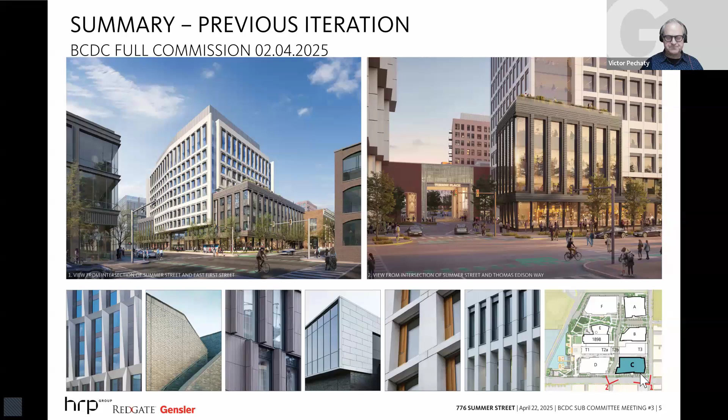These are two vignettes that are stills from an animation shared at the February 4th full commission meeting. We're showing these images because they really did spark discussion and concern about the heaviness of overlapping building forms over the pedestrian realm.

That comment and concern took us to a fundamental new look at the overall massing of the site. Those iterations transitioned us from the option you last saw on the right, a concept we called fold, to the current concept we're sharing this evening, now called podium. The fundamental difference is the fold concept has the taller portion of the building overhanging and proud of the base. Among other changes, that relationship has now been inverted, with the 10-story portion of the building recessed from prouder elements that are part of the base, which we're referring to as two podiums.

Please note the red property line and setback line. The new massing continues to give back area within the building's ground floor footprint to expand and enhance the public realm.

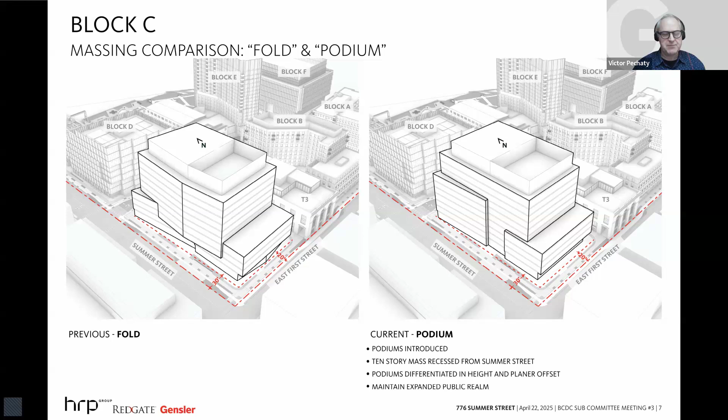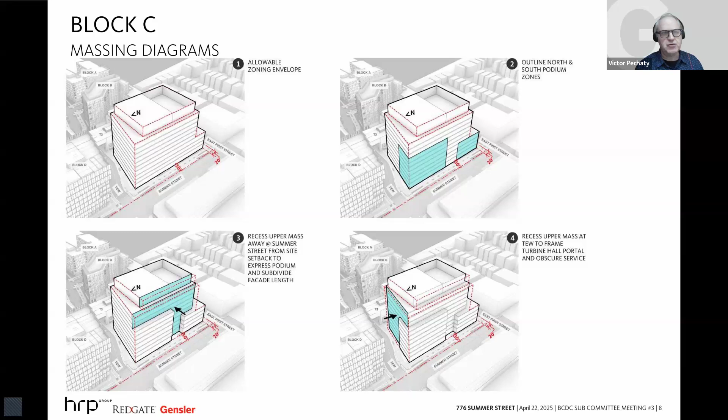The next two slides are eight diagrams showing the rationale behind the new podium form. Diagram 1 is the allowable zoning envelope. Diagram 2 outlines where the projecting forms will result. Diagram 3, one of the more significant moves, takes the full height of the building and recesses it 15 feet back from the setback. The northern facade is also recessed further from Thomas Edison Way to reveal the two projecting forms, the north and south podium.

Diagrams 5 and 6 show that the south podium is further recessed from the site setbacks. Diagram 7 shows the north podium taking on an angle to guide pedestrians coming from the north towards the building entrance. Finally, diagram 8 shows an ongoing commitment to transparency at the ground floor.

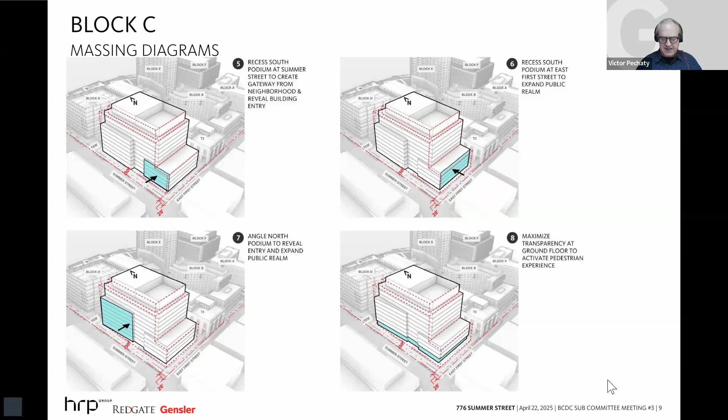The master plan design guidelines stipulate that Block C should mediate scale from higher portions of the site towards the waterfront, transitioning downward towards the 4-story development along East First Street. The two projecting forms, the two podiums, transition from 10 stories to 7 stories to 4 stories to honor that design guideline.

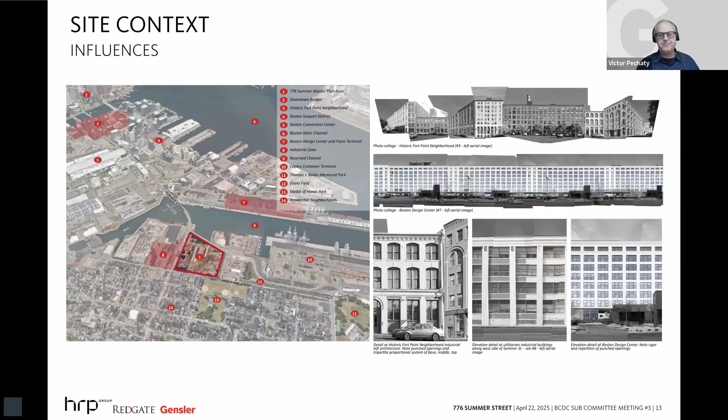The adjacent turbine halls are also examples of architecture that celebrates its industrial use, but at an entirely different, one might say monumental, scale compared to the precedents we see in the historic Fort Point neighborhood.

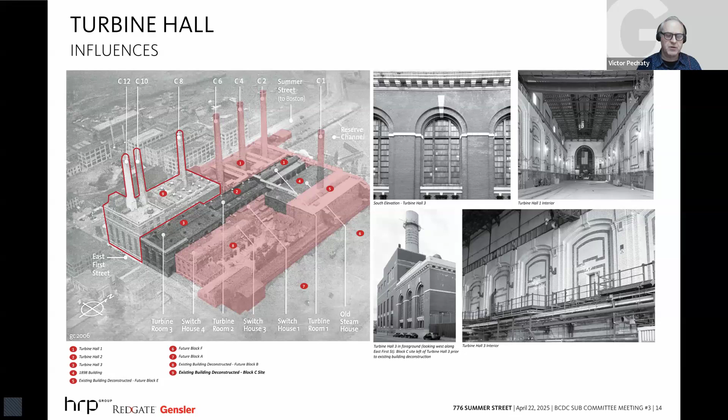In the current design, it isn't our intent to literally replicate some of the details that informed the design, but we do seek to synthesize some of those influences through a modern lens into a building that reveals the DNA of the industrial architecture of the area.

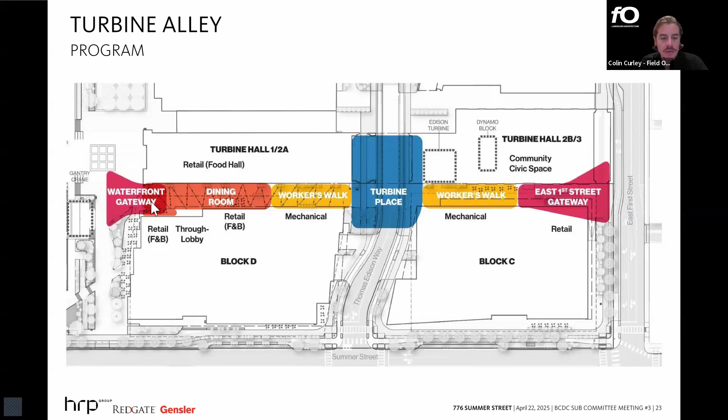Okay, so quickly here, this is the plan of Turbine Alley. Significantly, we've elevated the corner at the northeast corner here to 25, so we have a flush condition at the building. We no longer have that sunken recessed condition. A planter subdivides circulation down into the alley, with opportunity for civic and community space to spill out, but really thinking of this stretch of Turbine Alley as the pedestrian connector to the more active waterfront.

And I think, Victor, if you want to just speak to the character here. I'll wrap up, Christina. Thank you for the bit of grace.

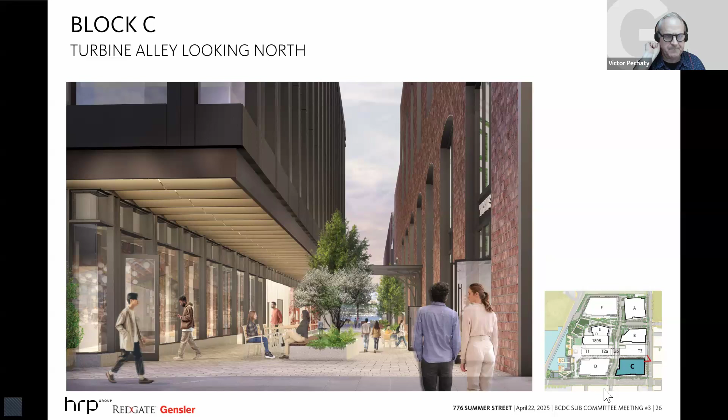We're showing you 3 animations tonight. The first will be here with Block C, and the other 2 will come later. Kate, let's roll the animation, please.

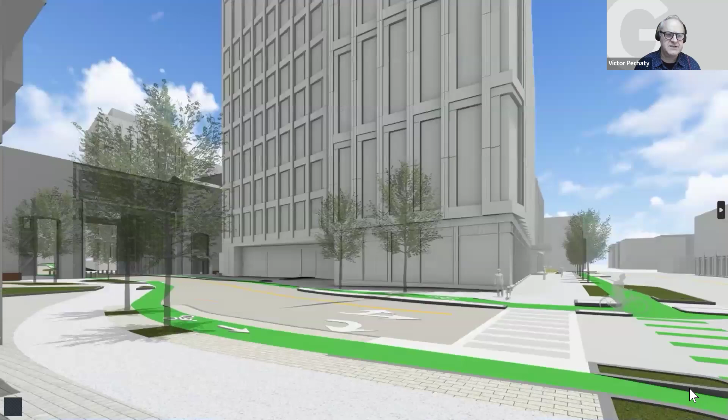So the walk starts north of Block D. As we walk along Block D, we'll pass the Block D entrance to our left-hand side, continuing to walk along Block D with the storefront and retail to our left, arriving at the intersection of Thomas Edison Way and Summer Street, where we'll look to the east, seeing the portal into the Turbine Hall beyond.

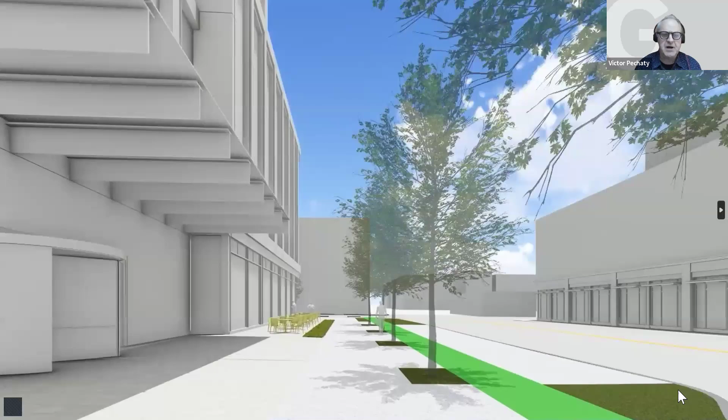Crossing Thomas Edison Way, the northwest mass of Block C provides a good illustration of the stepped facade, canting back towards the main entry into Block C, highlighted by a steel and glass canopy. Just south of the Block C entrance, the public realm widens again for a few bays, providing more street frontage. As we approach East First Street, we'll look to the east and see the portal into Turbine Hall 3.

That's a wrap for Block C. Kristina, thank you for a couple seconds there extra. I really appreciate it. Not a problem.

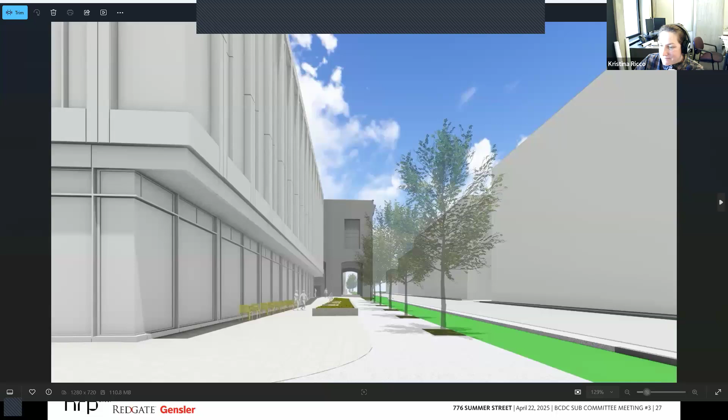Commissioners, we turn it over to you for discussion. Thanks, Victor. I just wanted to say, Victor and Colin, that was a really clear presentation. Thank you for walking us through all this. I think I was at the last presentation of this building, so it's nice to see it emerge and evolve.

David: Oh, thank you, I was going to say the same thing. Thank you very much for the presentation. I think that I very much understood the process that you've gone through. Just a couple of quick comments, and I'll keep my comments focused on the architecture.

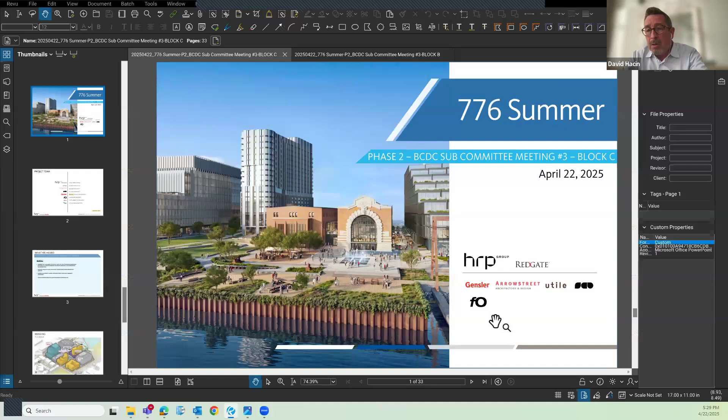While I very much appreciated the sculptural, dynamic quality of the first scheme, I also understand why you've come to the new podium design, and I found that strategy to be particularly compelling in the elevation diagram where you showed how it would step down to the neighborhood along First Street. I thought that was a very thoughtful diagram that will go a long way in terms of the actual experience of that street and sort of holding the edge of that street, so I think that all makes sense.

I also appreciate the simplicity of the framing techniques that you're thinking about using here, within the historic context of waterfront architecture. I guess I just have a couple of questions and comments that I might ask you to think about. When you did the animation, it mostly has to do with the storefronts at the level of the storefront itself.

We've had this conversation many times about how important it is to keep the flexibility of the storefronts to accommodate multiple retailers, et cetera. But I do find it a bit relentless, just in its simplicity and purity as it moves around the building. On the piece adjacent to Thomas Edison Way, where there's the serrations above, I think actually that's quite dynamic, Victor.

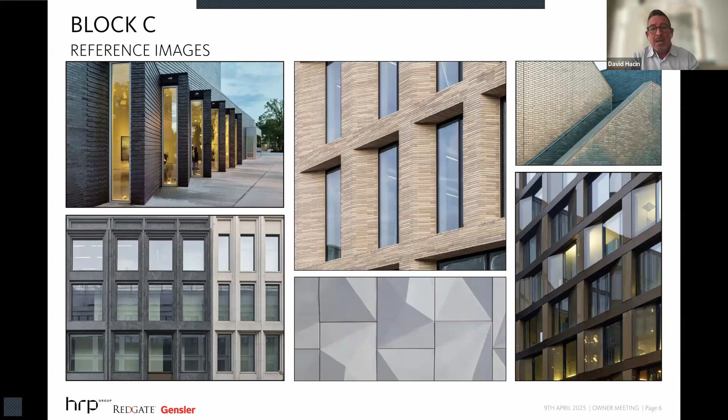If you go to that view, down East First, I think you're referring to. Yeah, thank you, that view. I mean, the framing is very clear up above, and it's just a little severe, to my eye.

The other place where there may be an opportunity to really echo the scalloping and some of the ideas that you had in the first scheme is in the canopy of the building itself, the canopy to the front door, which I think right now is a sort of simple extruded frame, which is very elegant. But I wonder if that couldn't be a little bit more of a statement, especially given the very sculptural quality of the building next door. Is there something there that could really announce entrance in a way that recalls some of the folding and stuff like that you have elsewhere in the scheme?

A question. And then my last comment is that I'm all for contrasting with the brick of the turbine hall and making the new building read against that. And I'm not suggesting brick. However, it does feel cool. The building feels very cool relative to the warmth of the historic structures. And I wonder, as you think about the palette of the panels and stuff like that, is there an opportunity for it to...

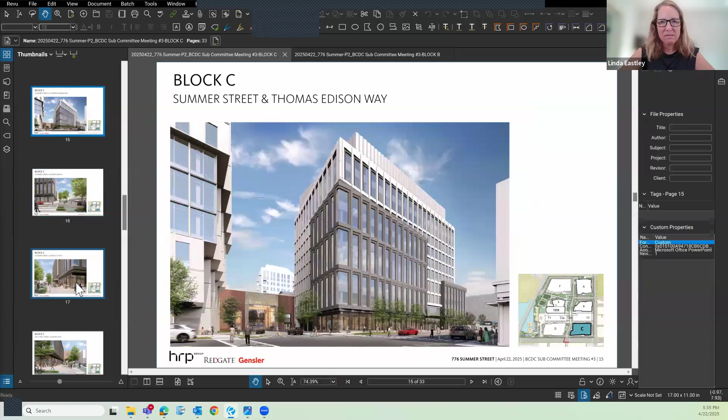I'm really talking about the corner at Summer and East First. So I think this one's okay. My comment here is I think you were describing the different heights of these framed windows, and I actually think that they're quite successful. And I love the idea that you're announcing this is an important corner. I actually think it'll feel very much like a gateway to the project as you're coming along East First Street.

But I am struggling with the scale. I think these are 3-story framed windows. And I wonder if you've looked at other scales, and it might be helpful maybe to go to one of those earlier images that show, yes, that's great. I wonder if you've looked at other scales instead of doing a triple height framed window here on the corner, whether there's another scale that might feel more in keeping with the pedestrian and the idea of having an entry here.

Commissioner Eastley, similar to what I said to Commissioner Hacin, this is also an ongoing conversation with staff. We have studies in process that were a little underbaked for this session. Staff had questioned the scale, the size, the height of those openings, so studies are already in process and we'll be providing different iterations for that piece.

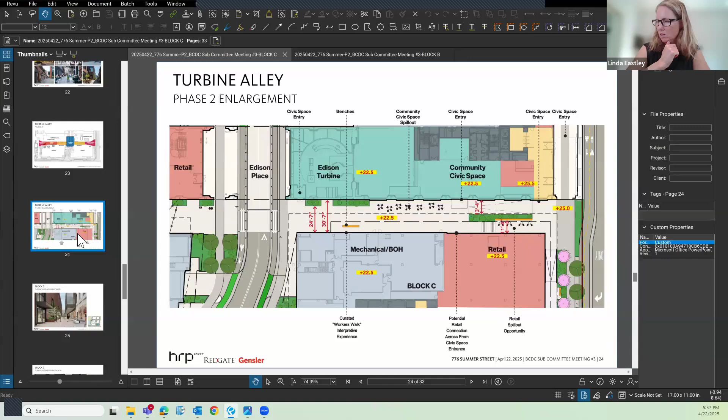Thank you. My next series of comments are about Turbine Alley, so Colin, these might be more for you. If we could go first to slide 24. There are two things I'm curious to hear more about. We're looking here at essentially the back of mechanical space in Building C, is that right? That's right, yes.

Okay, and so the idea here is that there would be a type of graphic telling the story, the history of the turbines, something along the lines of telling stories of people, some kind of history of the whole power plant there. Okay, so my comment here is that I wonder if this will feel like it's too long.

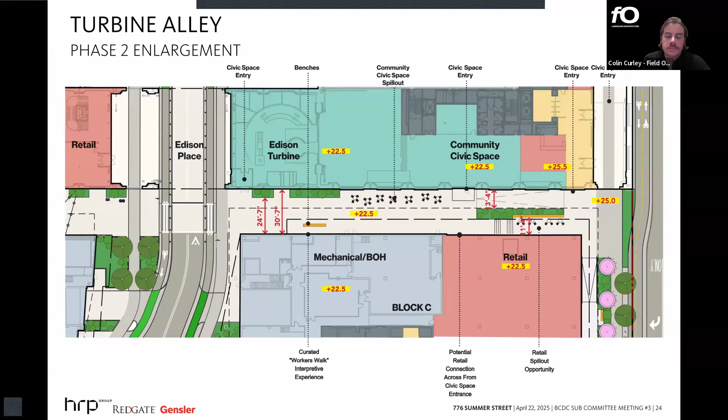It's a really long part of this building, and I actually love that this becomes the pedestrian passageway from East First Street. If I'm remembering right, you can't get between Building B, on the other side of Turbine Hall, and wiggle your way through as a pedestrian. Correct, you can only get through here, and that's why I think it's such an important passageway. But that's a really, really long mechanical back-of-house facade here, and I'm wondering if there could be something more interesting that happens here.

And then the second thing is this really pronounced overhang that really closes out the sky in what should be a really exciting pedestrian passageway. I'd love to hear whether you'd looked at ways of maybe even making that overhang one story taller, or the pedestrian experience one story taller, so that space doesn't feel as pinched. That, combined with maybe a more animated way through this alley, would go a long way. Part of that is also thinking about what the evening experience is through this particular place. So those were my two big comments about the project.

I do really like that you've pulled back Building C from the intersection of Summer and East First. I think that plaza, where you have some of the bistro tables and other things, makes a lot of sense to me. Again, I'm not really understanding why there needs to be an overhang there. At first I thought it was so you weren't blocking the view to the turbine hall loggia, but I think it's just more of a design detail, and maybe you just need that additional space. But as you begin to look at materiality around that corner, maybe you'll be exploring that as well.

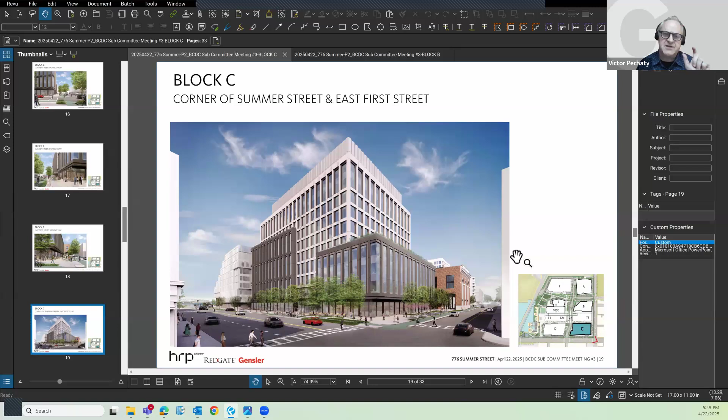Actually, one good thing that comes out of the overhang—it may be too far, but if you were in the alley, we also think it would be a challenging experience if 10 stories of building came all the way down to grade uninterrupted. So having that 3-story projection, we do think helps visually break the pedestrian realm from seeing 10 stories up. It may be that the dimension of that overhang is what's suspect here. So yeah, it's 3 stories. Thank you, Linda, for bringing that up.

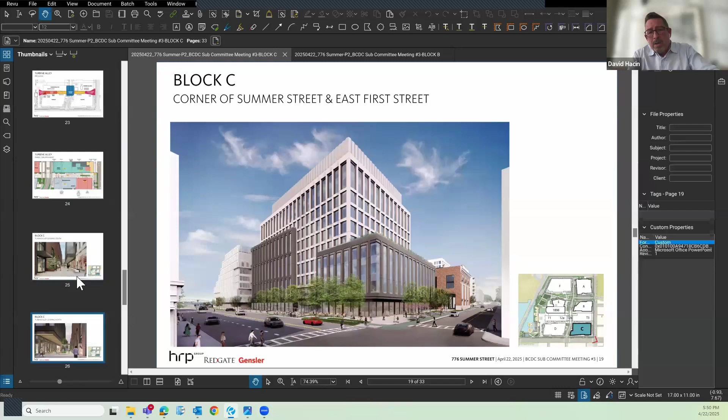Well, I'd just like to come back to that idea. Could you go back to that view, listening to David and Linda talk about this issue? I just wanted to throw out that, in my view, these architectural forms are pretty blunt, right? They're pretty strong forms. And I do go back—if that has to cantilever that much, I ask myself if there's something about the frame language or some level of ornament that could help support that cantilever, whether it's some expression of the structure, columns, or brackets or something. I don't know what I'm talking about exactly, but...

That could be lit up at night, that could add a lacier, more delicate quality to moving down this space, that is in fact a bit more European in its scale and character. So I'm actually wondering if it's less an issue—if it can't go anywhere, that gets to the issue of the treatment of the underside of it and how it relates to the walls. I think it could actually be a very nice passage if the building kind of loosened up a little bit in that space somehow. So I'll leave it there.

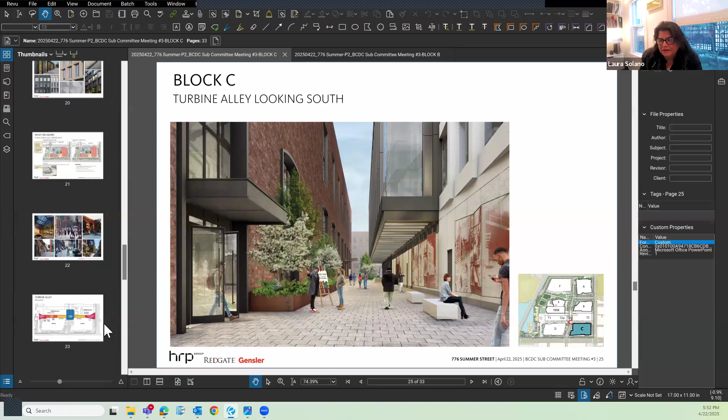Yes. Could we go to a site plan? And while that's coming up, I do appreciate the change to the podium at the base—I think it really gives a very elegant base for the building. But the thing I'm struggling with, and maybe you've mentioned it several times, Victor, is that while you have enlarged the public realm, I don't know that there's been a benefit shown to that other than there being space, horizontal space for that.

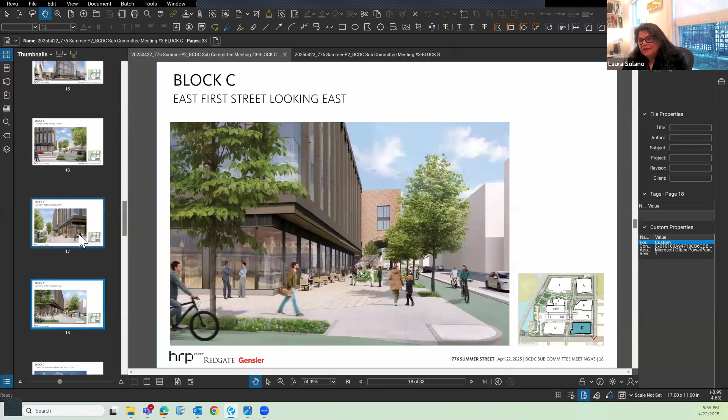So if you go to some of the perspectives that show the building in the context of the landscape—either one, we can look at all of them—I think one of the issues I have is that the building and the landscape are having a conversation, but I'm not sure it's a very interesting conversation. There's so little space for the landscape that I would like to see either the building do something to really energize this corridor, or the landscaping to do something.

And I'm not talking about off the charts. The place that we are is very urban, so I'm not looking for a garden as much as I am at kind of having a place when you're there. Right now you're kind of showing the tables tied in, the pavement is kind of all the same. And I'm wondering if there isn't some kind of reflection of the building that acknowledges that the landscape is there, that it's not just the landscape pushed against it or parallel against it.

I honestly think these are the hardest kinds of landscapes to do because there's so little room, right? And if you really care about urban spaces, then you want to be generous with things like tree pits. It sounds really prosaic, but it's critical to whatever landscape you can get in there actually having a chance to be healthy and grow. So I would like to see a few more layers on the landscape, or changes to the building that will help that, or both.

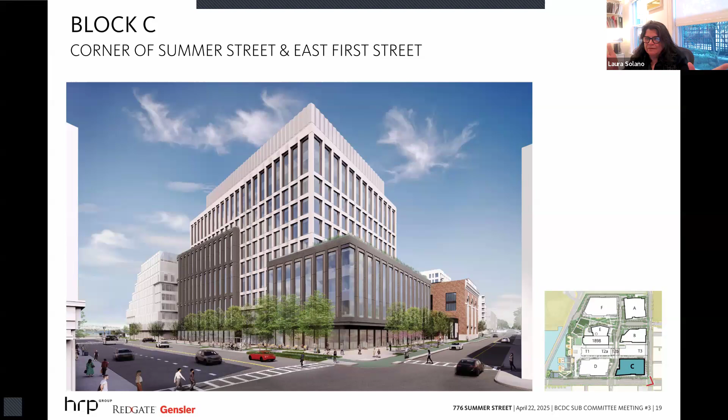More, more to it. And then if we could look at the perspectives around, there's kind of a sameness to them as well. Again, I don't need every single facade to be a different landscape, but just as in a building where you have clues about where to enter and where the retail is, I think there need to be those same kind of clues telegraphed into the landscape.

So you've got it here where this is the place to stop, but is that the right language for it? How important are the corners? Do the corners have a place in the landscape of occupancy as opposed to intersection?

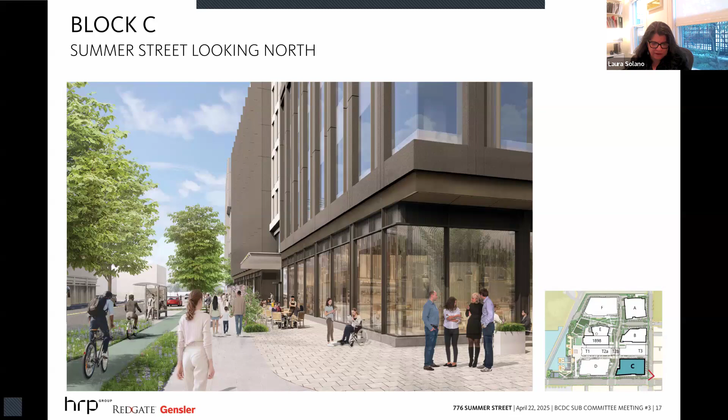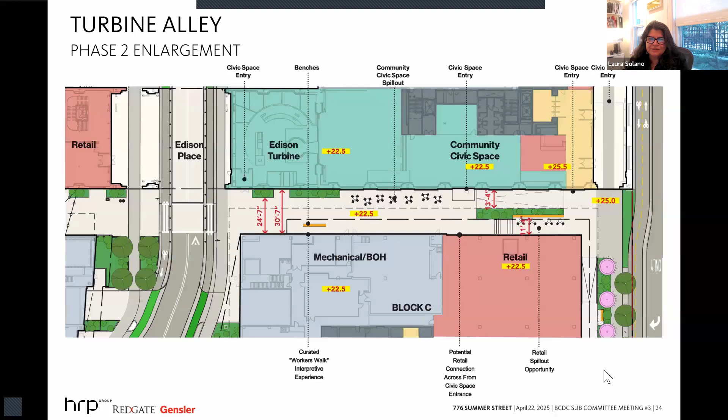And I think that overhang has really tied the hands of the landscape architect, because there's no mystery about this. The thing that can be so lovely about different alleys that you see in many different cities is that there's no mystery here, and there could be some mystery here. So is it right that you see a bowling alley all the way to the end? I don't know. I think that should be re-examined as to whether or not this should be both a place of passage and occupancy, and I think it's up to the landscape to determine that and give the character of this.

Architecture can only do so much in these kinds of spaces, but landscapes can be really powerful. Maybe it's with lighting, there's lots of different opportunities. But again, just like I've talked about, what are the layers of the landscape that are going in to make up this space, not just the layers of the building. So I'll leave it there. And Linda, I managed to come in below our time, so.

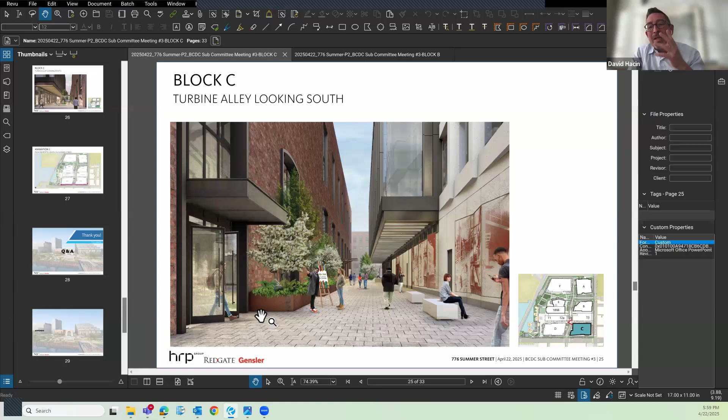Yeah, and it can be so subtle. Right. But we're all drawn to those kinds of places.

And landscape has a great ability to do that in the city. It's interesting too, I like the idea of the pinch point. I think the cantilever is only a third of the space, but it feels like it splits 50%. It feels more overwhelming than 30%.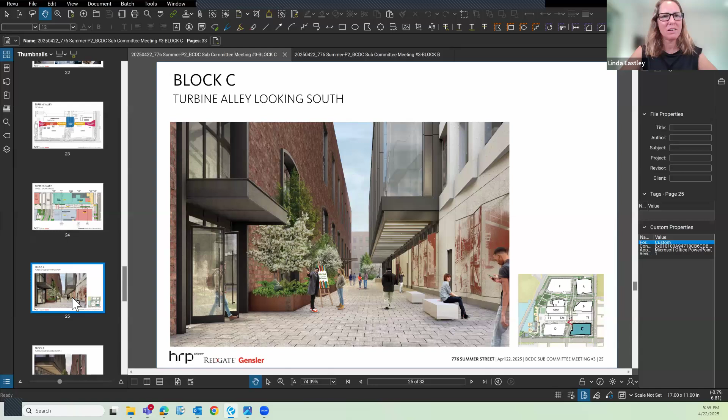All right, I'm going to hand this over to you, Kristina.

Great, thank you, Kristina. Hi, I'm Jason King with Arrowstreet, and I'll be walking you through the refinements of the Block B residential building. You can go to the next slide.

We're starting with the full build site plan again to reorient everyone, and we'll highlight that Block B occupies an important location on the site as it fronts East First Street facing the South Boston residential neighborhood, sits directly next to the historic Turbine Hall 3 building, and along with Block A forms a gateway from the neighborhood into the 776 Summer Street development.

If we go to the next slide, we wanted to begin by resharing the concept massing diagrams that illustrate the key concepts for the project as a refresher before jumping into our recent updates. These diagrams have been shown before, so I'll move quickly and note that as we've refined the building's architecture, we remain committed to the original design goals: using the massing to strengthen connections between the neighborhood and the Summer Street development by angling the building for better sight lines, lifting the building up at key moments to enhance views around Block B to the historic 1898 and Turbine Hall buildings, and keeping the East First Street volume low in respect for the neighborhood's residential scale across the street.

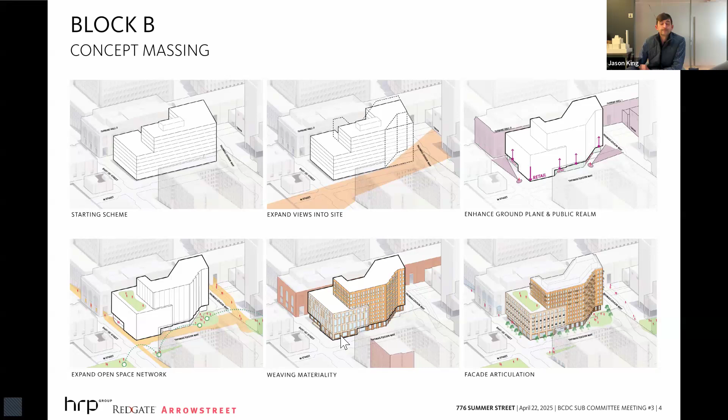Moving to the next slide, through our conversations with the commissioners as well as BPDA planning staff, comments for Block B have primarily focused on the public realm. Beginning on the left of the slide, we heard that we needed to provide more information regarding the space between Block B and the Turbine Hall 3 building along East First Street, to better define the architectural approach for how we navigate the grade difference between the finished floor elevations and sidewalk elevations along East First Street.

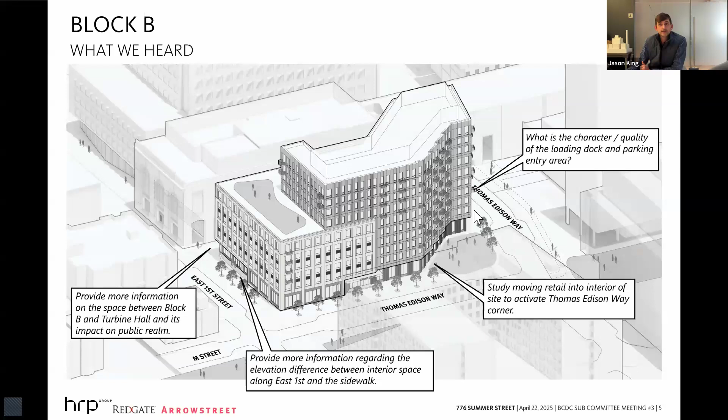We need to study shifting the retail program further inward to complement the public realm activity of Block E Hotel, Block F, and the Edison Plaza. And finally, to better define the architectural character of the Block B and Turbine Hall 3 loading area and its impact on the public realm.

We'll start with a plan. On the left is the plan presented in February as part of the full commission meeting. As you can see, the retail space shown in red fronts East First Street, with the building amenity spaces shown in orange fronting the new open space at the Thomas Edison Way corner. On the right is our current plan, where we've swapped these two programs, placing the residential lobby and amenity spaces along East First Street and moving the commercial retail space to the corner.

These moves have created positive impacts to the architecture and the public realm that we're going to illustrate through a series of ground plane vignettes and perspectives later in the presentation.

As we move towards the bottom of this page, we've relocated the residential parking entrance along Thomas Edison Way further south to share a curb cut with the loading dock, reducing the total number of curb cuts from two down to one, and restoring more landscape and sidewalk area to the public realm.

We've also revised the architectural expression along this facade in a few different ways that relate to the site's history and enhance the story, serving as a positive contributor to the public realm.

Finally, on the right, we have designed the space between T3 and Block B as a colorful, welcoming space for users looking to access the Block B and Turbine Hall 3 bike rooms, and have revised the ground plane architecture along East First Street to respond to these grade changes.

We'll share perspectives of all these views as we move through the presentation. On screen now is a before and after perspective view taken from the Medal of Honor Park. Moving the retail program to the Thomas Edison Way corner has allowed us to do a few different things. One, revise the scale of the ground plane architecture to bring more of the upper building's architectural expression down to the ground plane along East First Street, creating more opportunities for articulation of the facade. Two, it created areas for planters to help navigate the grade change along this edge of the building. Three, it helped us create a larger diversity of uses along East First Street, including residential lobby spaces, fitness space, and an exterior porch space that help activate that street edge.

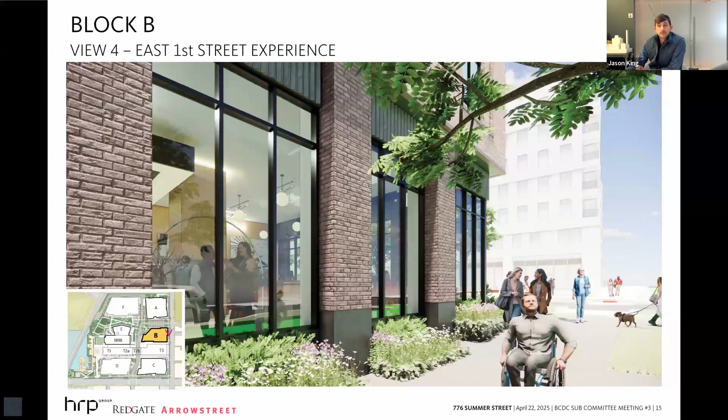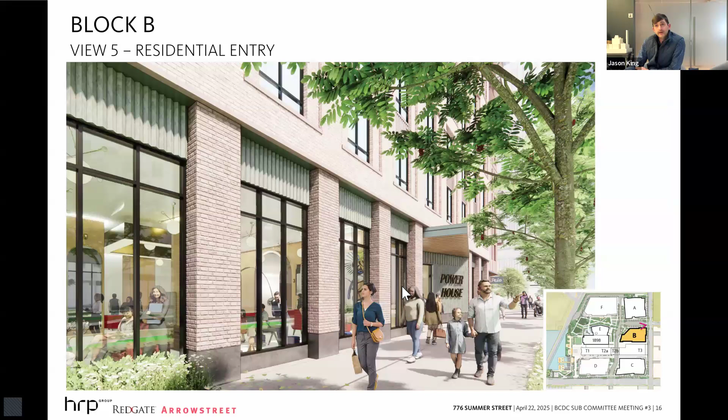Moving to the next slide, we've turned the corner onto Thomas Edison Way, and you can see where the rhythm of the piers developed previously is then broken at the building entry to create a larger bay to help clearly designate the point of entry.

As we move to the next slide, you can see a slightly different view of that entry point. We're envisioning a change in material at this moment to one of a rich color and varying textures that again help accentuate and clearly identify the residential entry point.

Moving to the next slide, we've now turned the corner at the Thomas Edison Way intersection to see the potential of how that commercial, restaurant, or retail space can really activate this corner of the project with life, color, and vibrancy, making it a destination for South Boston residents, Block A and B residents, Block E hotel patrons, office users, and everyone visiting the 776 Summer Street development.

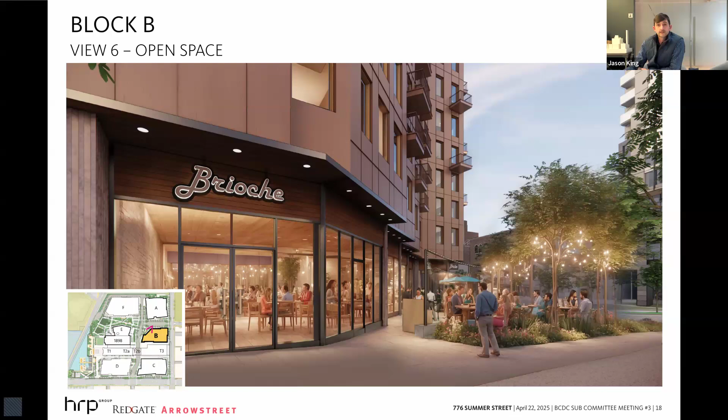Next slide, please. Continuing down Thomas Edison Way, that commercial space is to your left now, and the turbine halls are straight ahead. The ground plane remains open, inviting, and glassy as it turns the corner and extends down the north facade. This becomes a little more apparent as we move to the next slide.

On the left, once again, is the plan as it stood during the first full BCDC commission, where the residential parking entry had its own curb cut along Thomas Edison Way. We had not fully developed the architectural expression of this area at that point, but on the top left is where things stood, and we're using it to show the impact of that residential parking entrance on the base of the building and the public realm as a whole.

The vehicular entry point really bifurcates the base of the building, leading towards a more solid and visually impermeable facade. On the top right is our current design, where that glassier retail commercial space is able to extend further along the north facade, improving the overall public realm experience along this edge. The residential parking entrance has been relocated to share the same curb cut with the loading zone, reducing the overall number of curb cuts from two to one, and allowing the building to ground itself at this corner in a much nicer way.

If we move to the next slide, we've also begun to refine the architecture for this area above the parking entry and loading space by working to develop a design that can build upon Block B's close adjacency to the turbine hall and enhance how the story of the site's history and historical significance is told.

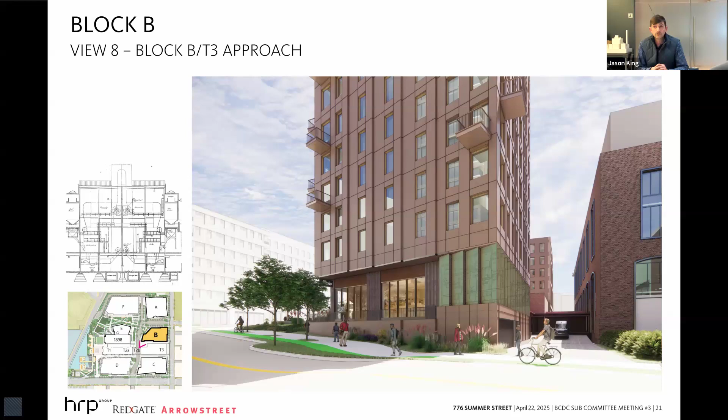As you move to the next slide and closer to the turbine halls, more of the perforated metal that's being used to screen the mechanical louvers and back of house spaces behind is revealed, with a screened graphic or perforated print that reveals an image tied to the site's history of power generation.

These images show an example of the power meters that are found in the original switch house building that were measuring the electrical output of the turbines.

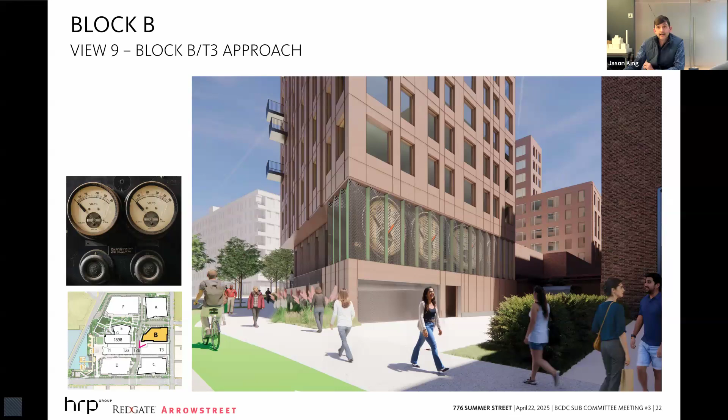And as you move to the next slide, we've moved into Turbine Place, where users will see this same imagery in context with the T8 turbine that's being preserved and displayed inside the T2 Civic space, just visible to the right of this image. So we're really excited about the ability for the Block B architecture to tie in with the site's history and to both enhance and continue the educational component taking place inside the T2 Civic space.

And finally, from a materiality perspective, we're continuing to use warmer building materials that include moments of interesting detail and texture to articulate the facade at moments of entry and other key elements for the project.

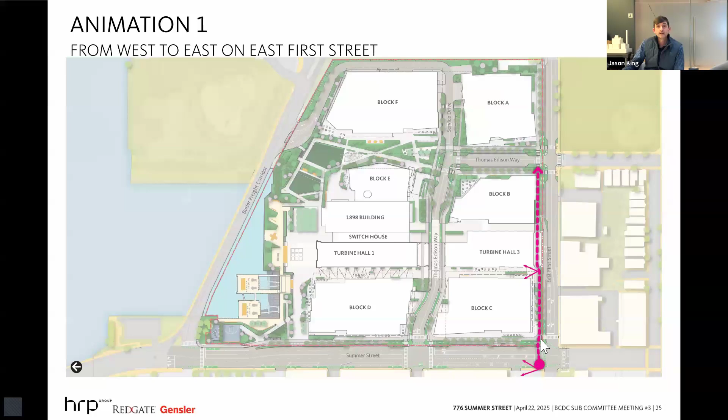At this point, I think we're going to switch over to the animations. I believe the first animation begins with Block C at that corner of East First Street and Summer Street and walks east down East First Street through the Turbine Hall Public Arcade and on to Block B.

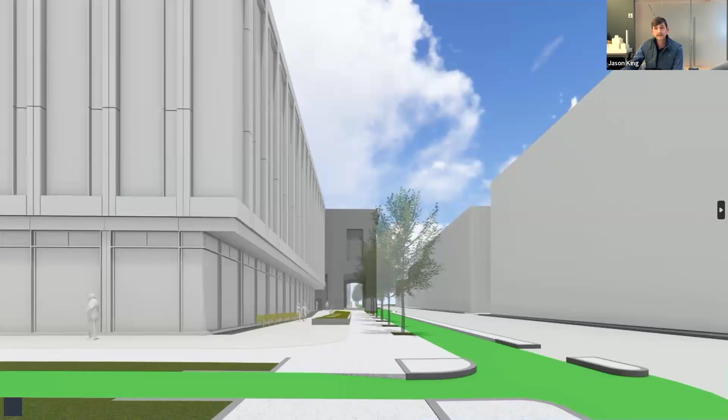So on the left, you'll see Block C and the public plaza space facing East First Street that Victor just spoke about.

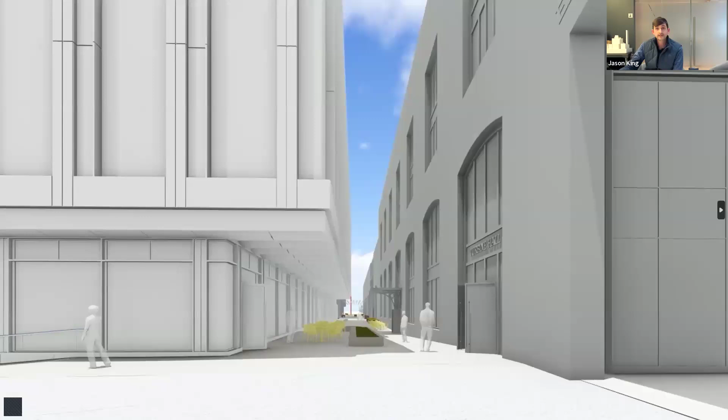As we move past the building and look left, we see the Turbine Alley public space that connects the neighborhood to the waterfront, which also includes entries into the T3 Civic space. From there, we walk through the T3 public arcade with entrances into the civic space, office lobby, and retail space.

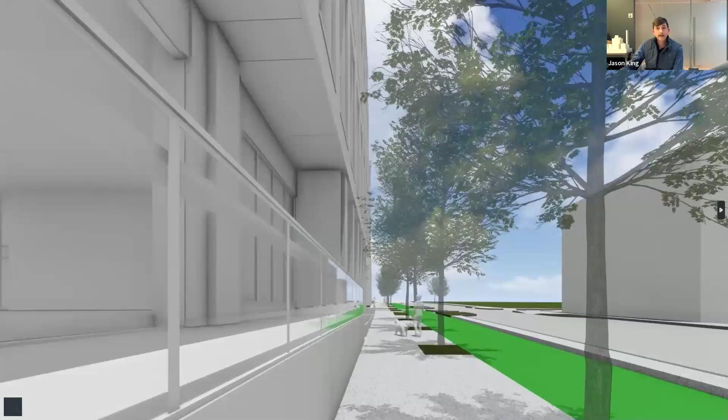Now we've exited and are walking along Block B. You see that exterior porch space to your left and the facade articulation along the new residential lobby spaces to your left, and we complete the animation as we hit the corner of Thomas Edison Way and East First Street.

And I think the second animation is going to lead us through Turbine Place. Thank you. So the T2 Civic space is just to your right. Through a glass curtain wall, you'd see the T8 turbine machine that's being preserved.

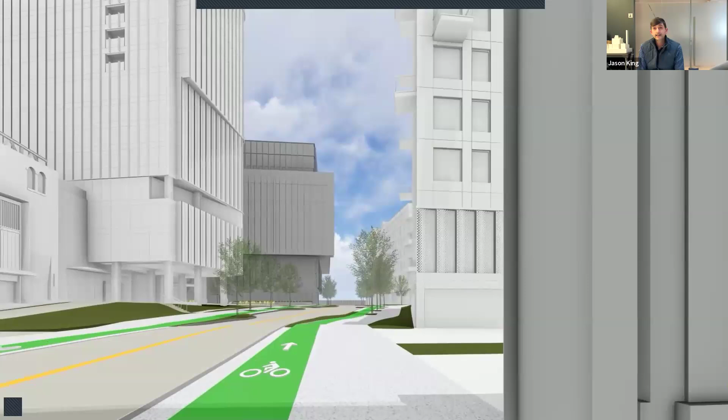And as we exit, you see the perforated metal facade where that historic image would be displayed, transitioning into two different images.

Continuing along the north elevation of the building, we're now walking through that area where the second curb cut was eliminated, restoring more sidewalk and landscaping to the public realm.

As we get to this corner, we'll start to look left and see the Edison Plaza space between Blocks E and F that connects the public realm to the waterfront open space.

And now we're turning back towards Block B and continuing down Thomas Edison Way. As you're continuing down, the Block B entry appears to the right, and then we end at the East First Street edge of the sidewalk looking towards the neighborhood.

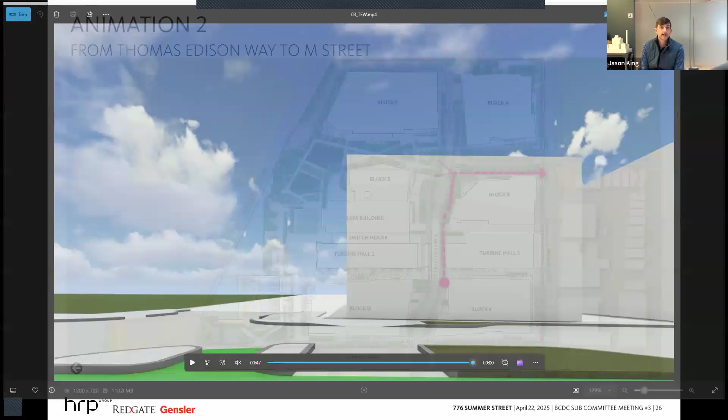And I think that concludes our presentation for Block B.

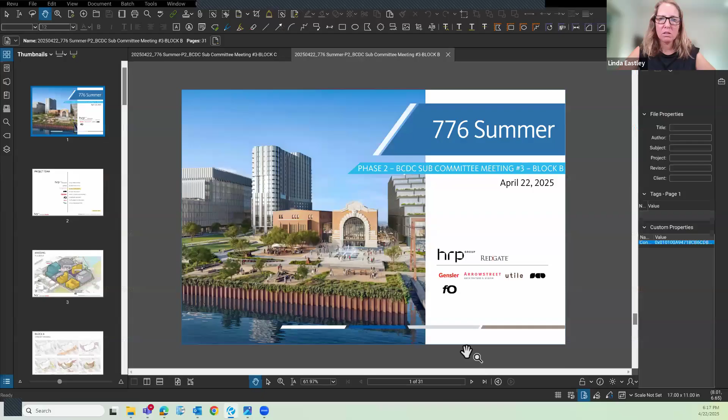Appreciate the presentation. Can you give us maybe a site plan or something just to start us off with our comments?

And could you blow that up a little bit? Thank you.

David, you want to kick us off? Oh, no, I thought you were going to go, Linda. Oh, no, go ahead. I see your hand up.

Okay, so I'm wondering about the relationship at the ground floor of this building to Turbine Hall. By the way, I think there are a lot of really nice improvements, especially around the base of the building on East First and on the east side of the building, bringing the lobby out to East First Street.

Bringing the retail into what I hope will be a very active Four Corners. I'm wondering about... another very nice thing is eliminating that curb cut. I wanted to mention that as well. That's really nice on Thomas Edison. But I'm wondering about the relationship of the building on the ground floor to Turbine Hall.

And I'm not sure - when you walk down East First, I was hoping you were going to turn left at the bike access. And when you walk down Thomas Edison going west, I was hoping you were going to turn down into the parking entrance access, because I don't really understand the seam between the two.

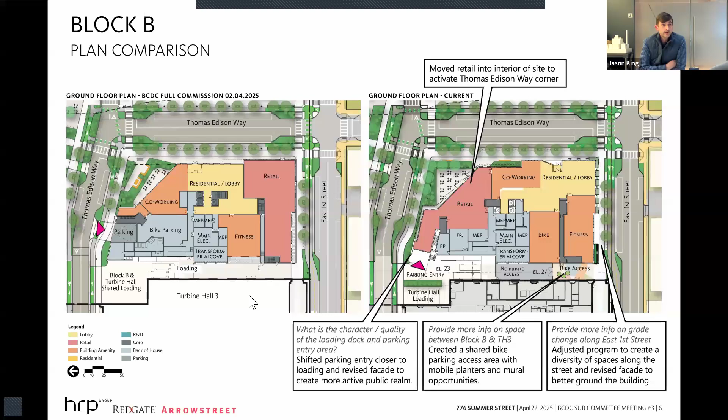dilute the importance of Turbine Alley. So we really want people walking through Turbine Alley from the neighborhood down to the waterfront, because we knew there would need to be loading activities and back of house spaces and support spaces along this kind of spine between T3 and Block B. So the intent was to not have pedestrian access all the way through on this side, and really focus that pedestrian connection on Turbine Alley.

And so are the loading docks that are on Thomas Edison - are they open to the sky and visible from the street, both the loading dock that says loading, and then the dock just east of it where there are two trucks, or a truck and a dumpster parked, and a ramp?

Yeah, so if we start at T3, within that gray space that says loading - just to the right - that's interior to the building. Just to the left of that, where it says Block B T3 shared loading, that is loading that's open to the sky. And then where you're seeing those two trucks, just north and to the right of that, that is also open to the sky with a canopy structure over the actual loading dock.

The two buildings are planned right now to share loading access. So T3 users would come out a door from that gray loading space onto that dock and use that ramp if necessary, or the two docks could be used by both buildings. It's intended to be a shared loading zone to try to consolidate those and not have two different zones of loading happening along this edge.

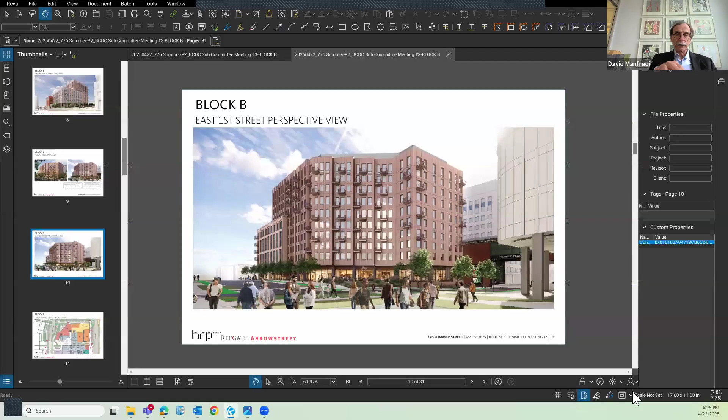I should have been paying attention to the numbers. Go into that little alcove that leads you to the bikes. I think it's nice that there's a break between the buildings where light comes down. I know there's a bit of structure beyond it. I wonder if you could do a little more with this space, the trees and planters feel like you want to move them at some point. I don't know if you need to, but you're right, they do feel that way.

This is also where Eversource will need to get access, potentially at some point, to the transformer alcove and rooms beyond. So we agree with you that they look like they could be moved, and we'd like to see more, but at the moment we're designing for that potential need to get these out of the way.

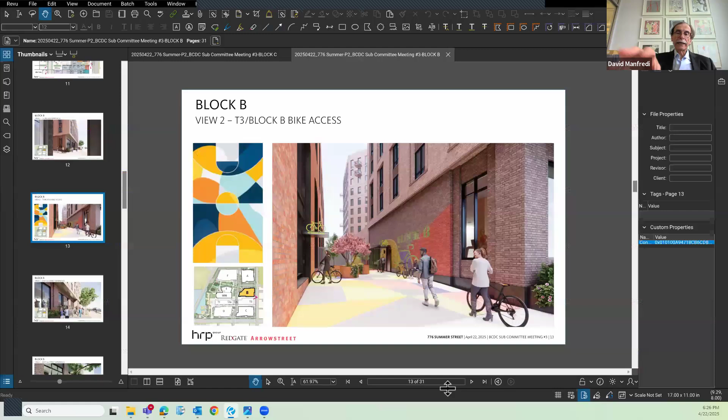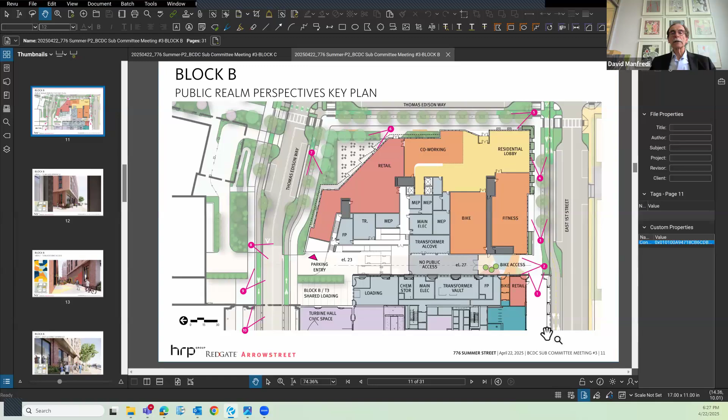I'm not sure I know your plan well enough, but that's fitness to my right. Could you bring the fenestration back further? Oh, I see you have a corridor there, but I'm just trying to animate that space a little more. You don't want it to be- I'm glad you've indented and not connected, brought the gray out further to First, I just wish it would feel more usable. I think we could do a better job with that core location and get more fenestration and activity along this edge.

So yes, point well taken, I think we can improve on that. I wish where fitness is, I'd love to see retail, but I know you've really got a one-sided street here in many ways, so I think putting retail into Thomas Edison, and if you can really make those four corners active, that could be a really nice space. So those are my comments. I do think there's a lot of really good progress and attention to where the enclosed building meets the public realm. There's some edges that could get better.

Thank you. Thank you, David.

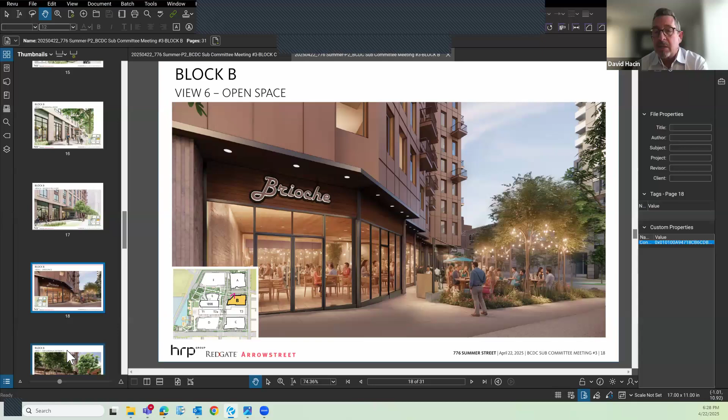David Hacin: Thanks, Linda. I just want to say I think you've made huge strides. I'm particularly excited about the retail residential lobby, the reprogramming of the ground floor, Jason. It makes so much more sense to me in terms of animating that central space in a lively way, and putting residents in a more passive way, in a sense, on this quieter side towards the neighborhood. I think that makes tremendous sense. I also really like the articulation of the building, and as David mentioned, the base and the warm tones. I think there's a lot about this building I hope migrates into other parts of the site, because it feels scaled to a very human scale.

As I think about the project we were just talking about, I almost wish there were a residential character attached to a residential building here as it hits the ground. I feel like some of the corporate character that's hitting the ground on some of the more lab-oriented buildings on this site could maybe be softened quite a bit and could pick up on some of the themes you're picking up on in this building. A few minor comments.

I see that you've reorganized the balconies. I think it's a fine line between creating something that's playful and something that looks chaotic. So as you develop that, just be thinking about it. Are there places where the balconies are anchored and then they dissolve in different ways? I was noticing in some of these views that it might be fighting the legibility of the forms a little bit. But that's completely up to you.

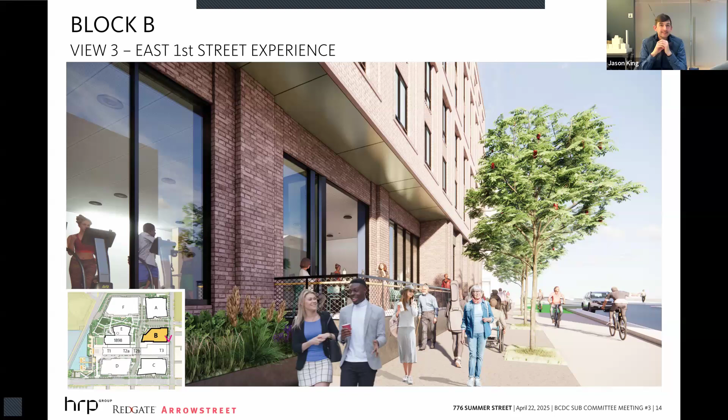Laura? Could we go to a plan?

First of all, the changes, the tour around the building was really so helpful. This is the first time I'm seeing this project in any form, or any of the buildings, and I appreciate the changes that were made. But I would love a tour around the building relative to topography - it's complicated, you're meeting other grades on the Edison building, and I want to make sure I understand that. Would you be able to do that, Jason, or maybe Colin could do it?

I can take it if you want, Jason. Go for it, Colin. Sure.

So a lot of the grade change on the site is happening on East First Street. Those grades fall away pretty quickly. When you're by number 5, you're around elevation 30, and by the time you're at the entrance to Turbine Alley, you're down at 25. So Thomas Edison Way, because we're tying into East First Street, that whole frontage is around 30. Similarly, Thomas Edison Way to the north has to dive down - we're pinched by the intersection, as well as meeting the 22.5 elevation of the turbine halls. So that side is coming down at around 5%.

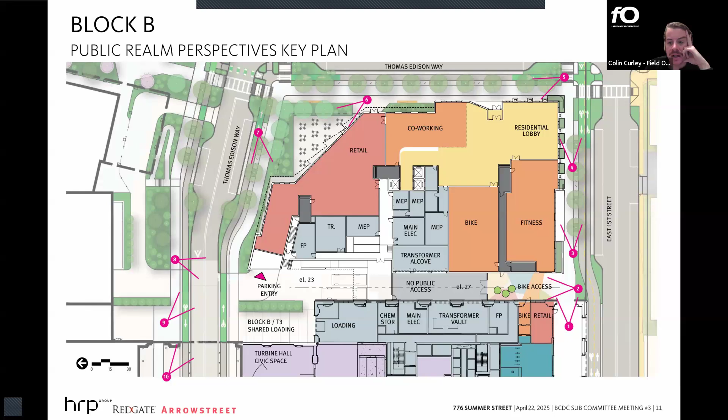So conditions - grade where it's flush is pretty much along Thomas Edison Way, favoring that frontage. That retail spill-out you can access from the building - there's also a small opening to get to it from the street. That's why you're seeing Jason's elevated fitness spill-out area there, because down by number 2, I think we're at 27 and change at the bike access, and elevation 23 over at the parking entry on the other side of the site. So generally speaking, level along Thomas Edison Way, pitching at different slopes on East First and Thomas Edison Way - a classic coming together of a lot of grades.

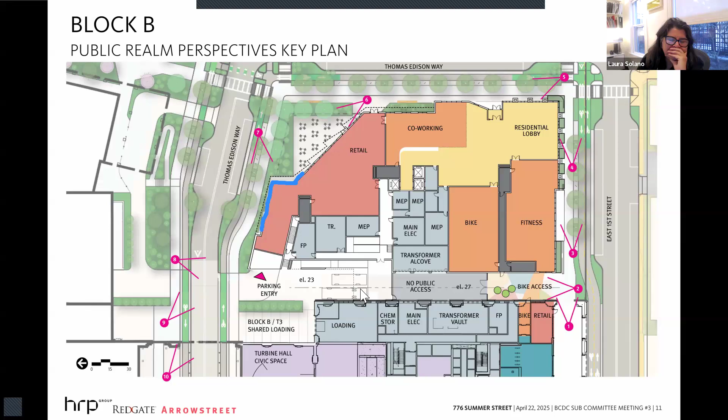What is this piece here? Is that into some kind of service, or I'm curious how that's connected and why it's connected that way - sorry, I just want to make sure I understand. You're pointing to this right here? Yeah, along where that blue line is, a continuation of that retail facade.

Coming along the north edge of the building. Previously that was much shorter with more solid mass because we were also putting the parking entrance through that spot. So the idea here is that we can wrap that glassier, more active facade around the corner. Yeah, exactly - so users outside of 1898 and the hotel are coming out and looking at what's on the right as opposed to what's on the top left. So is that occupiable, or - it is, okay, yes.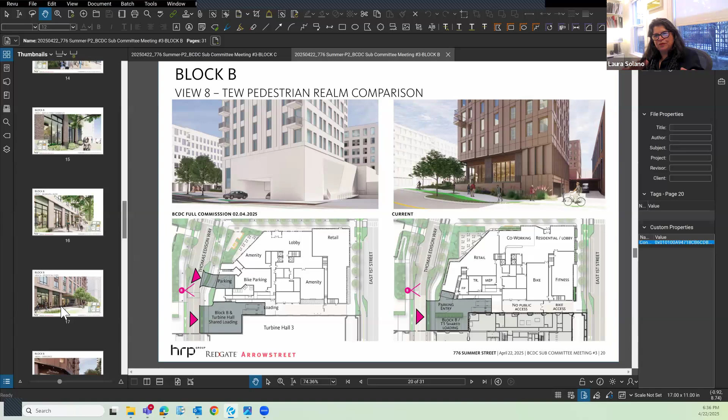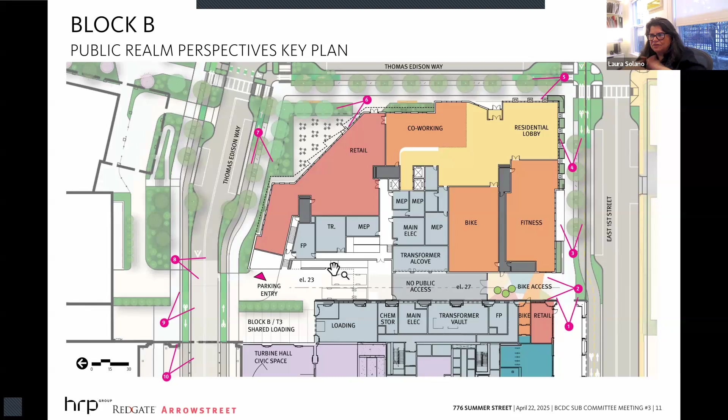And if you could zoom in a little bit on that area, because as Colin mentioned, you've got all these planes coming together, and it's really hard in an urban condition. There's a couple of things. One is, should you think about whether there's a layer of walls here to help calm the grade on the lower level, but also maybe provide opportunities on the upper level to think about this terrace as a different shape and not so beholden to being parallel with the roads. I think it might feel a little more generous and relaxed, since the building has a lot that comes down and meets the ground. So that's just one thing I think might be studied.

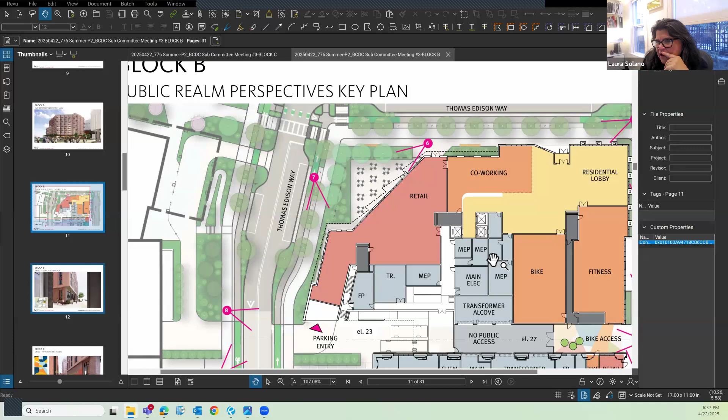And then could we go to this? I think it's the perspective, maybe.

I'll just say quickly on that corner, the idea is that the planter is what's taking up grade. So we're allowing it to sort of... but I just wonder if there's something that should hold the edge, and maybe it's a place for people to sit. I'm not really talking about like this. Sure, and even you may not even need the second wall that I drew, but it's something to think about.

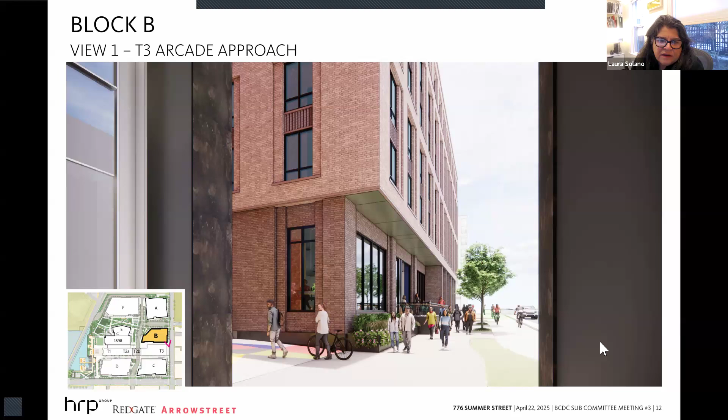Sure. Okay, let's look at the perspective that goes into the alley. So if I'm understanding this, these planters, this is an access for, who did you say needs to get in there? Eversource would need to get access because the transformer rooms for both buildings are behind the screen wall that's at the end of this space.

Yeah, so I looked at the plan and there's doors along this side, but you can't help but wonder, is there instead just an opportunity to do some planting along this edge so that you don't have to have those? I mean, moving these is like a crane almost, because they're so heavy.

And then architecturally, why not pay this a little more attention so that this space actually has a background to it, and it doesn't feel like there's one architectural expression, another one, and then a third one that is clearly the poor cousin. So I wonder if you thought more about what this facade to that space does, that it would actually feel like a much more sophisticated space and not a leftover space. And is there seating in there?

And my suggestion that maybe the plants come to the edge is that you never have to move anything, right? Take the planters out, let Eversource have free access anytime it wants. If you don't have to think about it. So some things to study, I think.

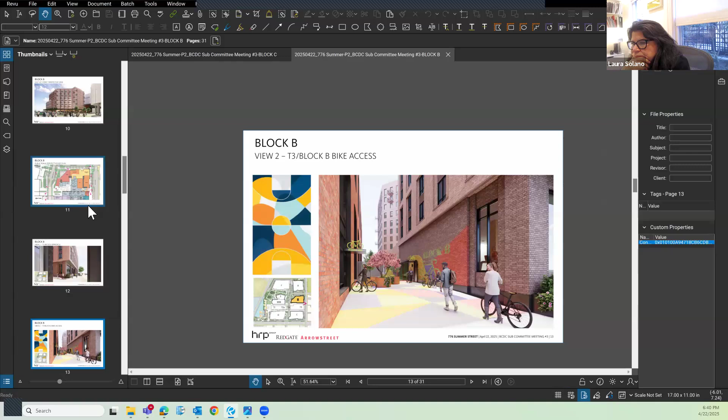Thank you, Laura. Almost all of my comments have already been said, which is great. I have just a couple to maybe elevate.

On slide 7, I really wanted to compliment the team on this, the narrower piers and the decision to really lighten up that ground floor is huge. Like we were talking about on building C, this also will be the gateway into the site along Thomas Edison, and then you've got that long view to the water from here, if we just turn the perspective a little. I think it's really going to be very successful. So I appreciate you listening to our comments about that and making that change.

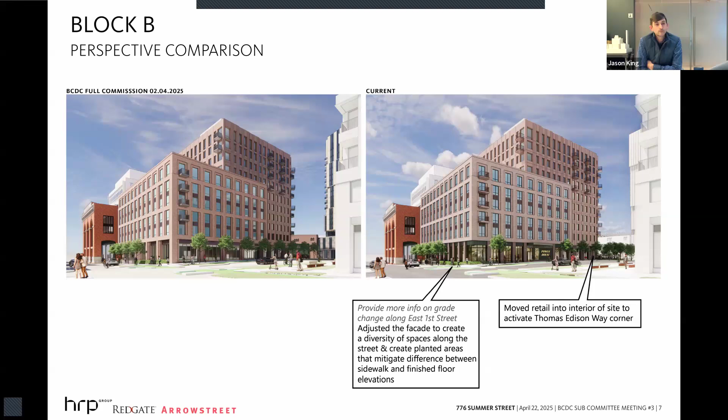I wanted to talk a little bit about porches before I get to the loading area. The porches, in my mind, for this building are a really unique element. I love the surprise factor with them. I'd really encourage you to be thinking about the language of those porches in maybe a more playful way. To me right now, they feel very practical. But if you imagine what's happening coming out of the fitness area, juice bar or whatever, that could be a really great social, playful space. You don't really get that reading the way it's detailed now.

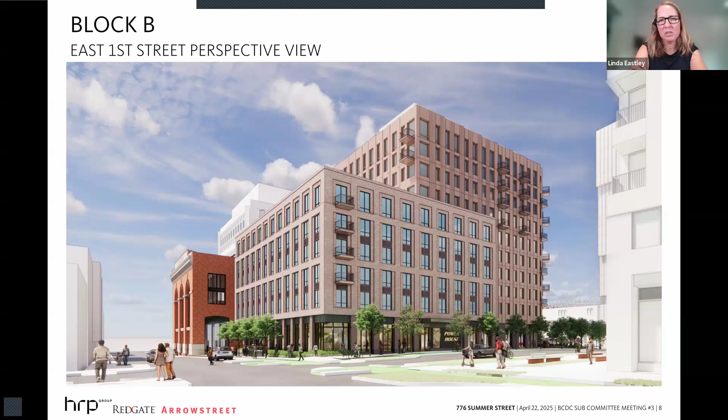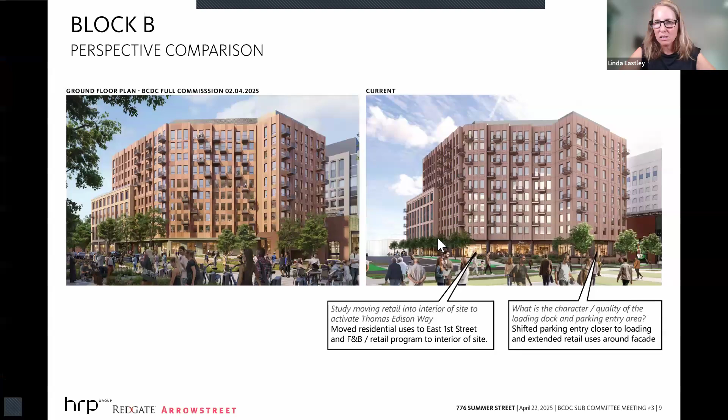On the flip side, on the north side, on Thomas Edison, the idea that the retail continues and the grade drops, and then you've got that porch condition - there was another diagram that might have been a little easier. I think that also could be a really wonderful outdoor social space, even though it's more intimate in scale. So I would think about that a little bit more. Can those porches actually become a little bit wider? As you're thinking about the animation of this plaza area and the food and beverage coming out onto that plaza area, could you continue it onto those porches as well? So I like the idea of the surprise element, and I would love to see it become a little bit more than it is.

The last comment, and David Manfredi talked a lot about this, is really about that loading area. The changes you've made with this building have been terrific. I feel like this is the area that really hasn't been studied as much as it should be, primarily because of the views into it from across Thomas Edison, and for anyone essentially walking into the site. So are there opportunities here for screening with walls or plantings? Are there opportunities to close off these areas that you really don't want anyone going into? I would love to see a few ideas about that when we have all of these groups come back for the wrap up.

Who shares that curb cut? Blocks B and the turbine hall, for their loading functions and for Block B's residential parking entrance.

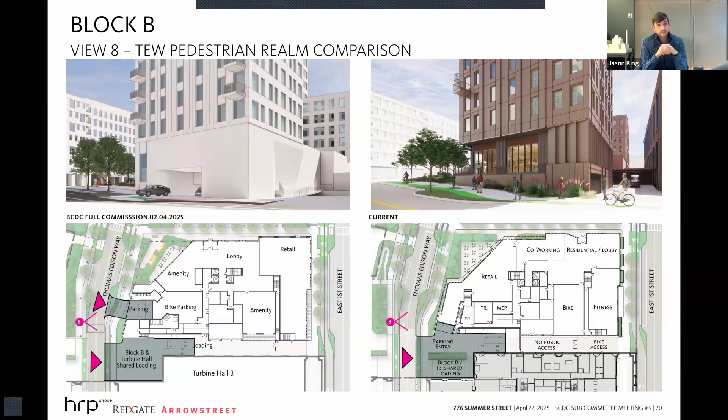Okay, my last question, I'm sorry - predominantly it looked like the building materials are going to be brick, is that correct? We're exploring a bunch of materials, to be honest, but yes, we're looking at masonry, including some metals, in warmer color tones, where we can add detail and texture through coursework or specific materials with a more vertical ribbed texture. Yes, definitely warmer tones for the neighborhood is appreciated.